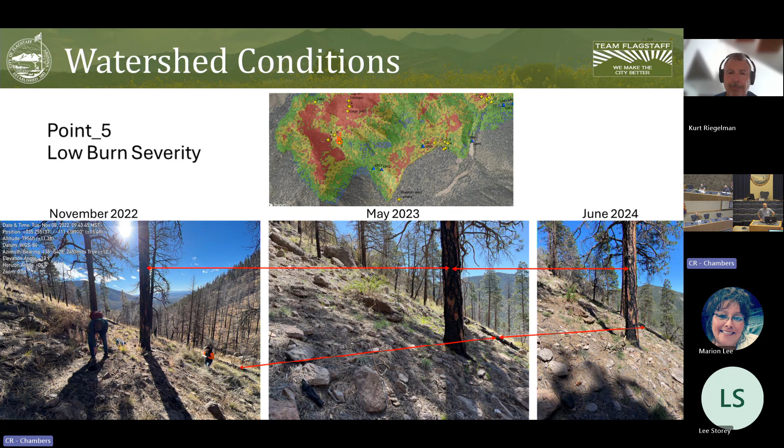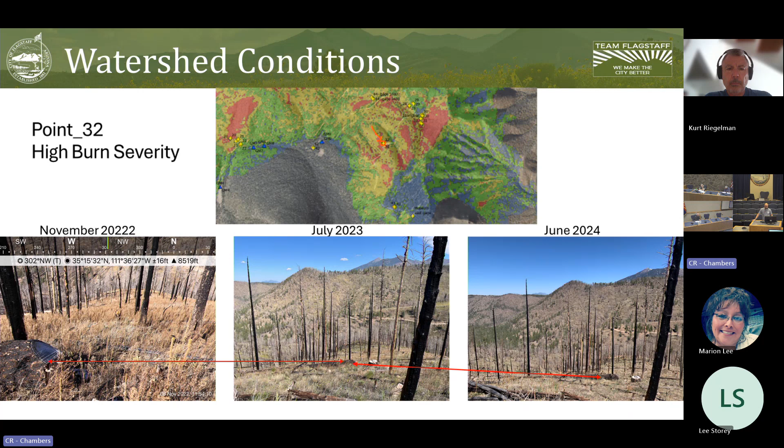Basically the takeaways, we've seen some recovery in the low and moderate burn severity areas. Some of the high burn severity has recovered to some degree as well. Mostly it's a vegetation state change for the moderate and high, so you're changing from a ponderosa pine forest to more grassland and shrubs, and that's been staying pretty consistent these last few years. Aspen and oak growth is improving. Spatial extent is pretty limited, mostly on those north-facing slopes. We've got quite a bit of early successional forbs and grasses coming through, so that is helping the watershed.

We're going to see a little bit less flooding than we did immediately after 2019. The significant blowdown of the dead trees is also helping. Looking forward, we're going to see how that recovery continues, and we're learning lessons from other fires in the area. Stormwater commissioned a study looking at the Museum predictions for the next 10 years, and we had some really cool results from the 1977 Radio Fire, which is on Mount Elden, to compare it. Cool in a scientific way, maybe not so cool from a flooding perspective.

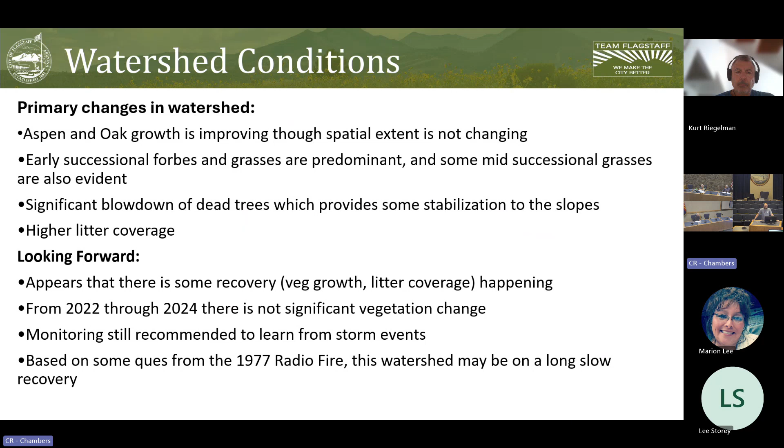So we do still see some heightened flood risk even in that 1977 fire, which is probably why Fanning Wash floods every 3 or 4 years. So the takeaway there is that we still have that flood risk in Spruce Wash. It's still quite a bit elevated from pre-fire. And then Joe's slides going into the 2024 monsoons.

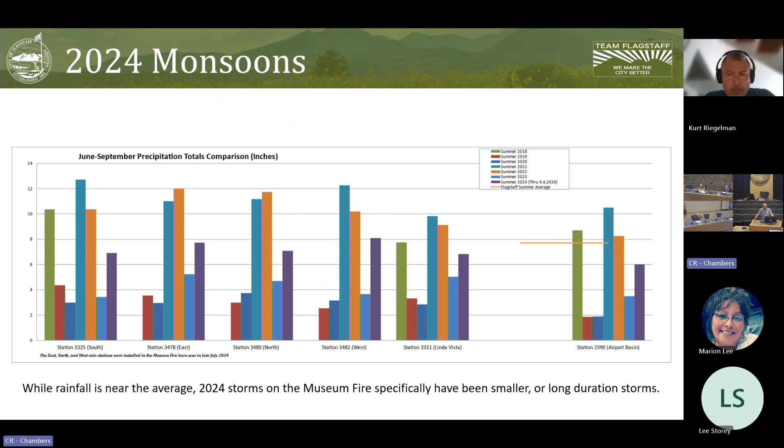A little busy here, but those purple bars on the far right of each station, so these are different rain gauges throughout the area. You can see that we had, I don't know, about average rainfall this year on that burn scar, but nothing that was too severe. And with that, we didn't really see much in terms of runoff.

One of the events early in the year is in June. It was over 2 inches on one of the gauges. It really got a lot of people worked up. But if you look on the radar on the right-hand side, you can see that storm barely hit that gauge in the burn scar. That one that's circled is 2.48 inches.

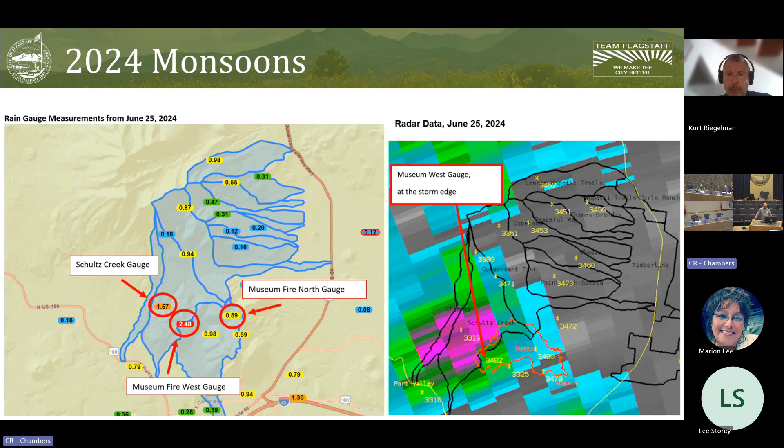That's Museum West, which is just right on the edge of Dry Lake Hills. So really, most of that rain was over on the Schultz Creek side and the unburned part of Schultz Creek. And that's why we didn't see much flow out of that one event. Again, going through it, we saw some rain events, but nothing that was too spectacular and nothing that really had large runoff. And again, one thing we're probably going to want to keep looking at is that watershed recovery.

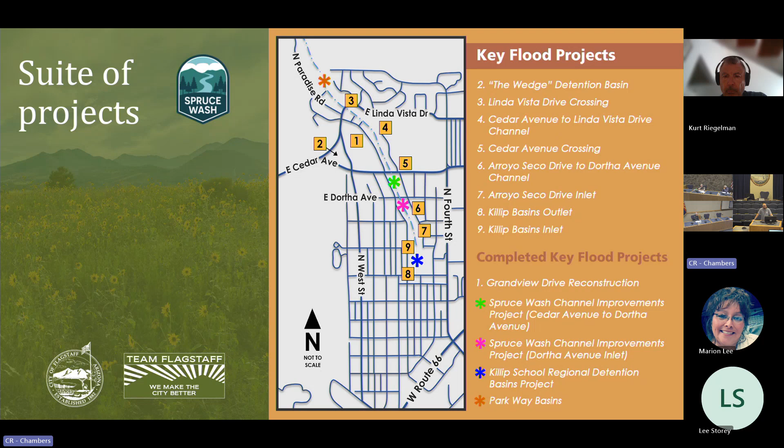So moving into some of those capital projects, this is that suite of projects for Spruce Wash, 10 projects. The ones that have a little asterisk are ones that are completed, and the ones that are still numbered are ones that are ongoing today. So obviously quite a bit of work, and we're moving very quickly on that.

So our original plan back in November of 2022, so just 2 years ago, when Proposition 441 passed, was to have this completed by the end of 2026. And we're moving pretty quickly on this. It's looking like the majority of this work is going to be completed next year in 2025. And 2026 will really just be final cleanup and closeout. So we are moving quickly.

Eagle Mountain Construction, who's the CMAR, the construction manager at risk, is working great with the team. We do have weekly meetings between our technical advisory committee and the CMAR.

Total estimated project cost right now is kind of bouncing around 39-40 million. So 26 million of that's from that Proposition 441 bond, and then we've been piecing together the rest and been really pretty successful with that. So a large component coming from our road repair and street safety, and then quite a bit coming from grants.

Apologies. So we'll go through. Go ahead. To take questions now or wait till the end? Sure.

I'm wondering if you could give us a little further description of the wedge project and the anticipated timeline for the closure of Linda Vista. I know that's a fair disruption to some of the residents in the area because the alternate is through, by the Puente de Hózhó and MEMS, and that's a nightmare in the mornings and afternoons. And so there are a lot of folks interested in when that will come to an end. Definitely. Yeah, so when we get to that project, I'll kind of walk through the timing on those.

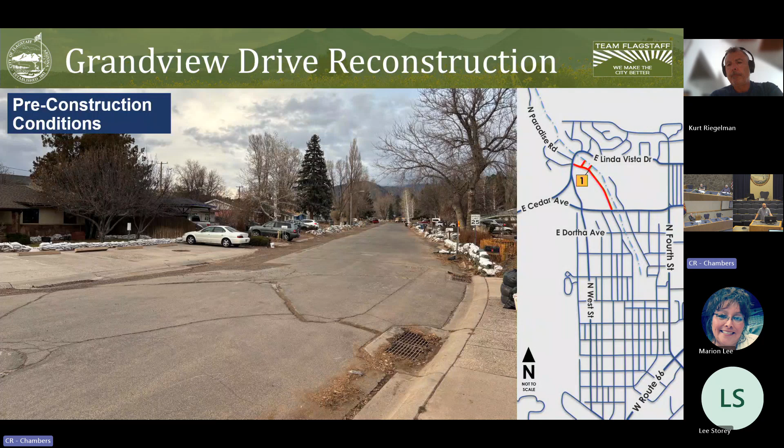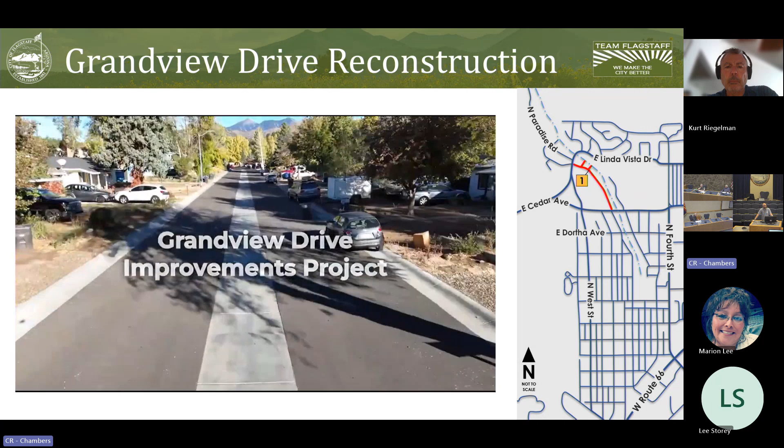Yep, no problem. So starting at the first one here, that's Grandview Drive reconstruction. Here's an old photo of it. The project was to invert that crown, and I think they actually had some drone video in this. So invert that crown so that the water is going in the middle of the street and then down towards Cedar and Main. So this is completed. You can see the street, the new curb and gutter. You can't see, but it cost a lot of money, the new utilities underground.

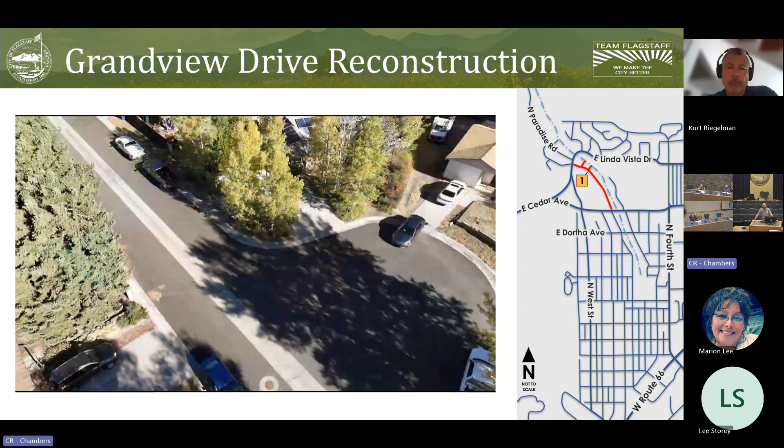So this has worked really great. And even this summer in those smaller rain events, we saw it work really great. So there's a lot of water in that central valley gutter that pushed it down to the terminal drain that pushed it back into the wash. So great project, great drone video. I believe that was done by our folks over in IT. But yep, so that one is complete.

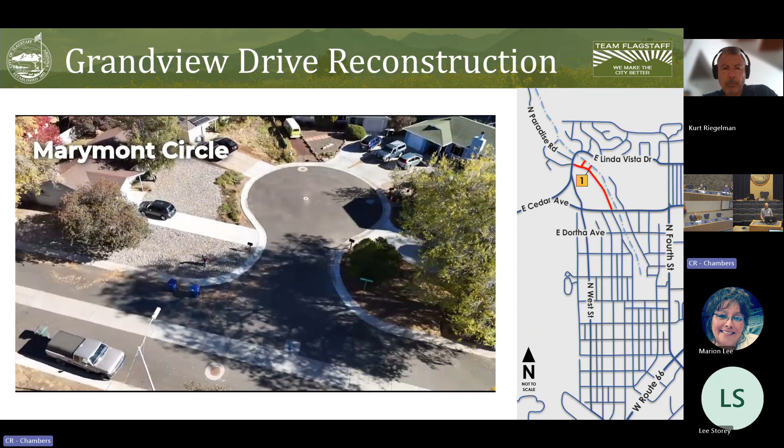All right, moving on. The wedge. So yeah, number 2. All right, so the wedge is an offline detention basin. So it is over in that area. We call it the wedge, the little wedge of city land over near Cedar Safeway.

So that is to take the overflow that will not fit in the channel and put it into the detention basin and meter that back into the channel along Cedar. To get there, what you're seeing in these photos is a 60-inch concrete pipe.

These are being installed right now, and that's the reason why Linda Vista is closed and will be closed until spring, as we complete the 60-inch pipe, as well as the Linda Vista culvert, which is also ongoing. We're doing both of those concurrently. A lot of work, they're moving fast.

If the weather holds up and we don't have a huge snowstorm, personally I'd like a lot of snow, it'd be great to go skiing. But if we don't have a big snowstorm, we'll probably be done with this early. But trying to be realistic and pessimistic, we're thinking springtime still for that closure.

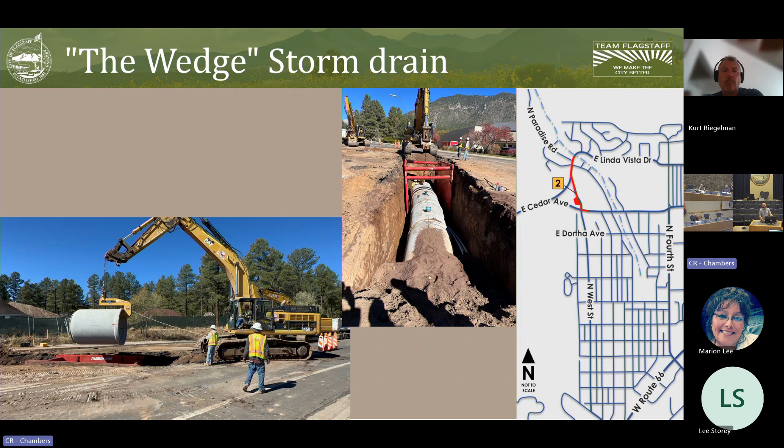But yes, we are very much aware of the disruption. I drive through it every day as well, so right there with you.

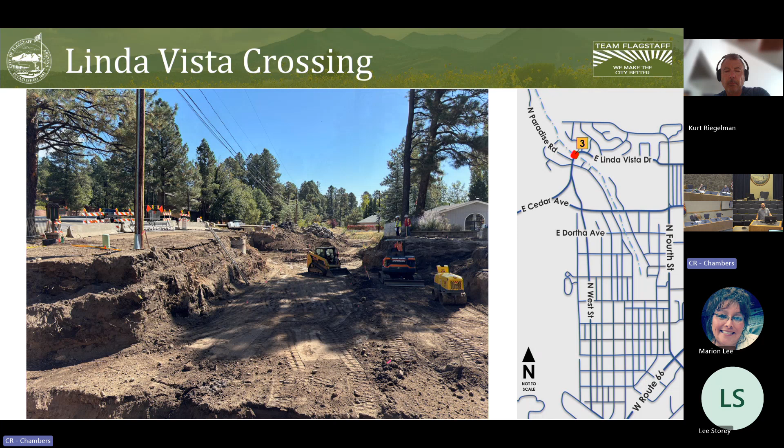Linda Vista Crossing, this is kind of an older photo. They're pouring concrete now, but that's that crossing, another reason why the road's closed. Moving quickly with it. This would be both the crossing to continue down the channel as it should, as well as the diversion into that 60-inch pipe when you reach a certain threshold. Here's some of the footings for it, and we're much further along as of today.

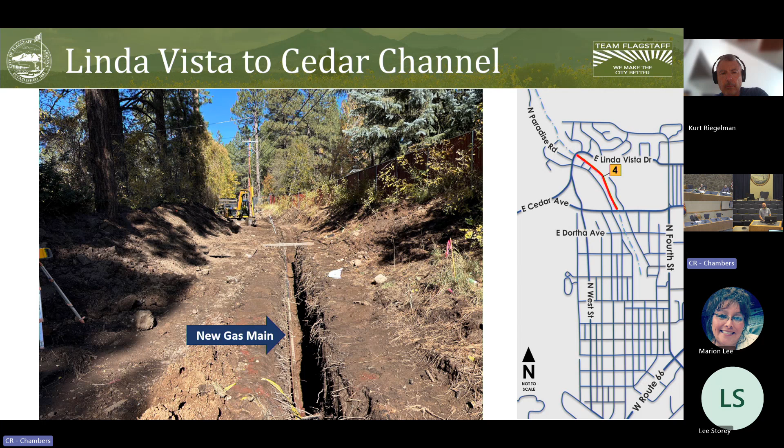Linda Vista Cedar channel. So we're doing the rough gradings going in right now. It was slowed up with some of the gas main, that's why there's a picture of a new gas main. There were some gas main issues as well as the service lines to the residents, but that's moving pretty quickly and will be a new shotcrete channel.

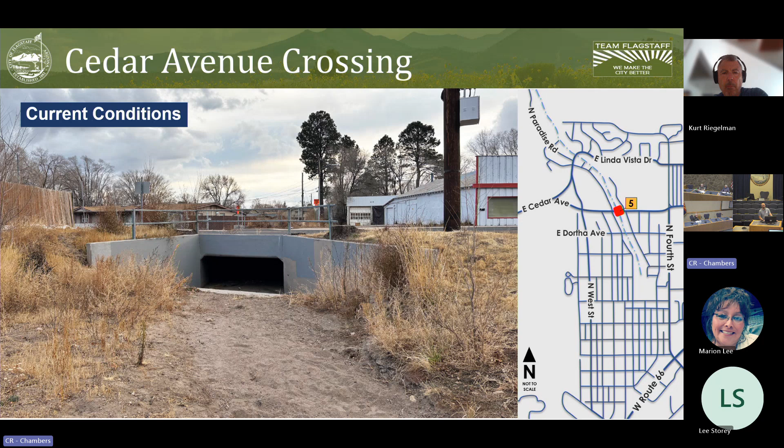Next, we see Cedar Avenue Crossing. This will actually be partially funded by a FEMA grant, one of the few FEMA grants that went seamlessly and quickly—I wish they all did. So here's our current condition, our concrete culvert, and the new culvert will be slightly larger and arched, so that will take more capacity, up to 700 CFS.

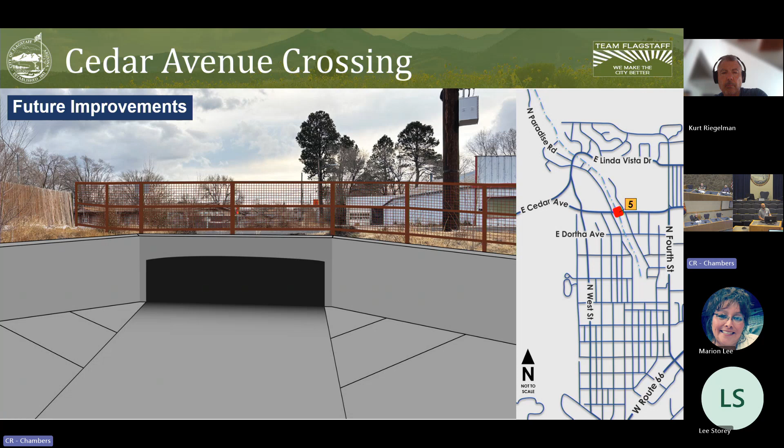And then what you can't see here is there will also be a lateral line coming in from whatever comes down Grandview, will be shunted back, and also the wedge will be shunted back to the channel underneath the road there. So you'll have some lateral storm drain coming back in.

Arroyo Seco to Dortha channel. This has gone through multiple design iterations, I think we're almost there. And that's going to also include some property acquisition that we are working very hard to get that congressionally directed spending through FEMA. It's been 2 years of wrangling, but we're very close.

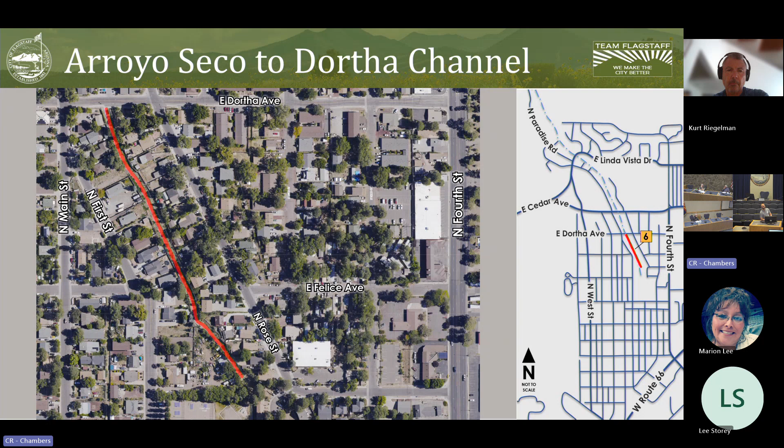And with that, we'll be able to buy a couple parcels that will help with this channel configuration, as well as help enlarging the Ponderosa Park—so it'll be a new portion of the park—as well as the inlet back to Arroyo Seco. This would be the inlet back into that 60-inch existing pipe.

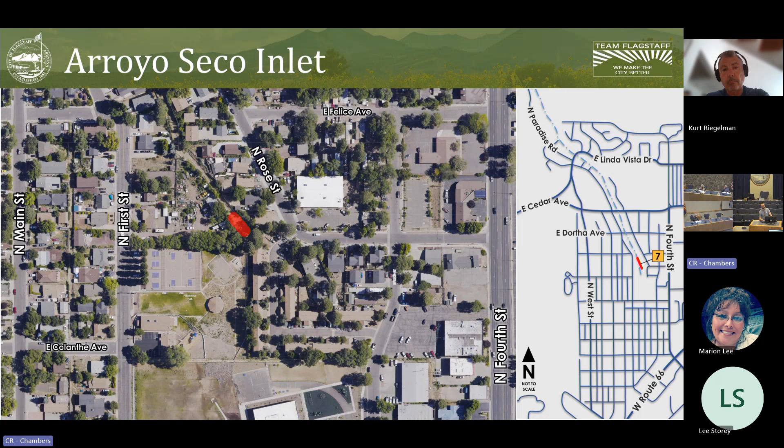What does not go in the 60-inch pipe will overflow through the park through a new natural swale—so natural, just kind of a low-lying area—and what we call the Killip Basin's inlet. It'll go through that swale and then drop down like a cascade into the existing Killip basins. There are 2 basins that exist right now that we built a couple of years back at Killip School.

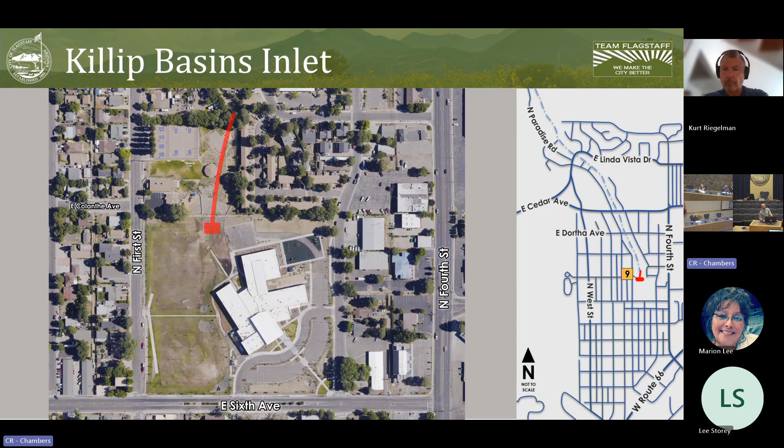And then a future one—this has kind of been stuck in limbo for a while, we're going to get it built one way or the other. This is another FEMA grant for the secondary Killip Basin outlet. So this is an outlet that would assist with the existing outlet. The existing one goes back to Spruce, but obviously that's going to be compromised when Spruce is flowing full.

So this secondary outlet on the north or southwest side will flow into the west wash drain, which is a 48-inch drain that goes down—I can't remember which street—but they'll connect to that, and then bring it down and connect back at Route 66 where it's open channel. So it gives us a second way to have a pressure relief valve, if you will.

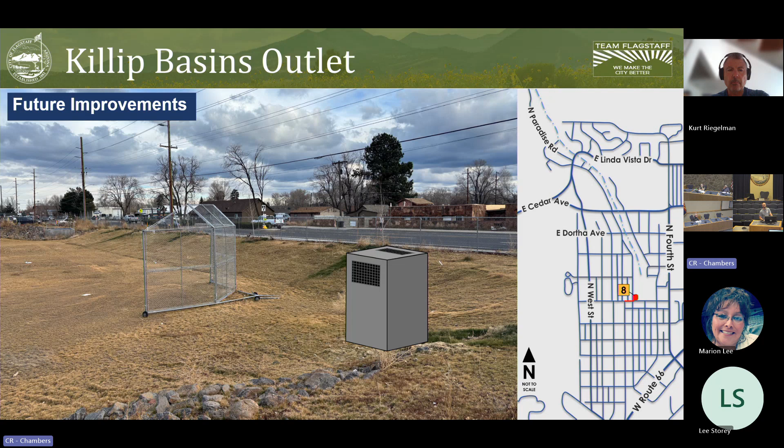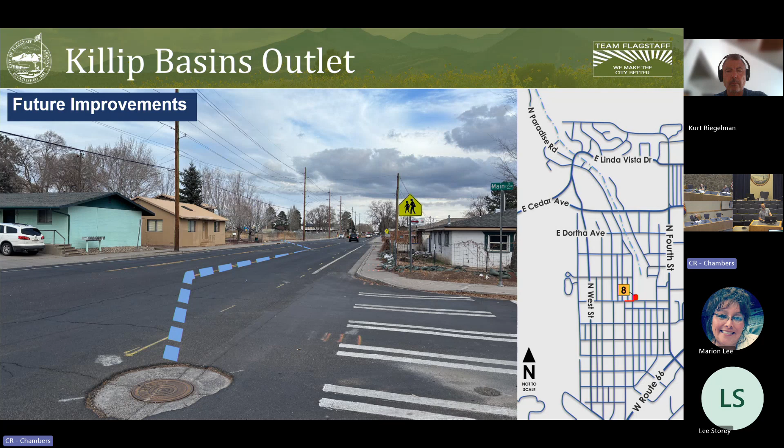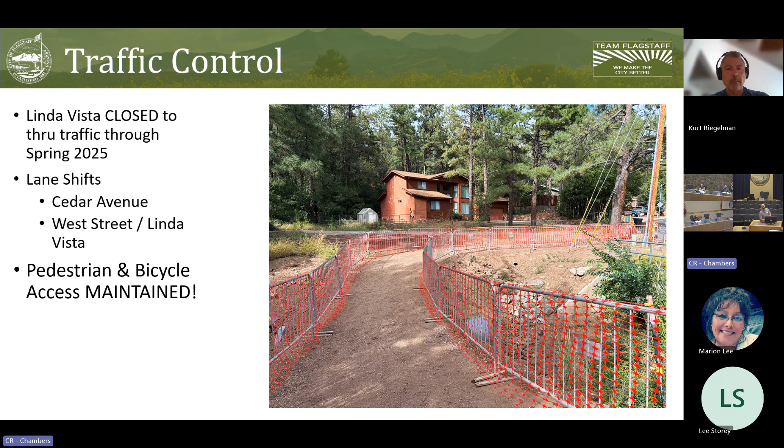So this really is the biggest road closure that we're going to have in this whole suite of projects.

Lots of communication going out with Beta PR, our contracted communications group, as well as Sarah Langley's group here at the city. So a lot of good stuff going out in terms of meet in the streets, news releases, door hangers, weekly newsletters, meetings with Sunnyside Neighborhood Association, etc.

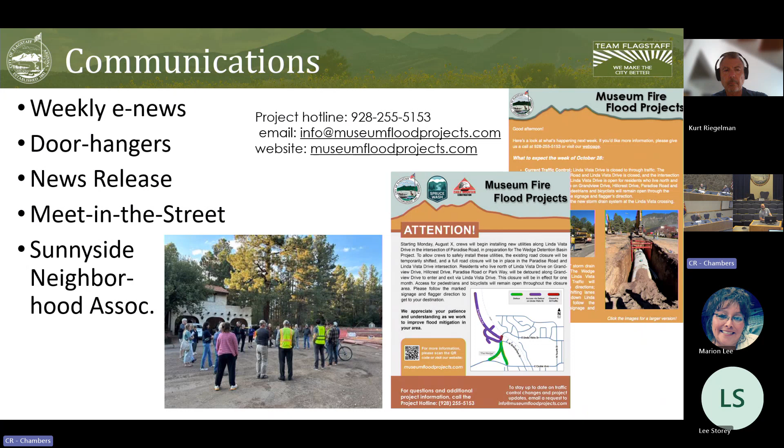All right, so moving from museum fire over to pipeline fire, from the east side of town to the west. Schultz Creek is complete, which is really pretty impressive for two years after a fire.

So it's a whole suite of projects, kind of hard to see on this map. Some county funded ones up on the forest in terms of sediment stabilization structures, our Schultz basins at the Schultz Y, Francis Short Pond being dredged, Savannah Way having a new swale installed, and then most recently, and probably the biggest, the Highway 180 project.

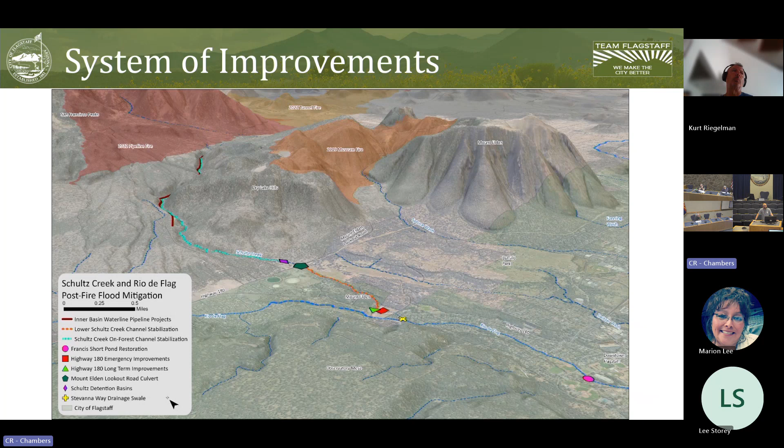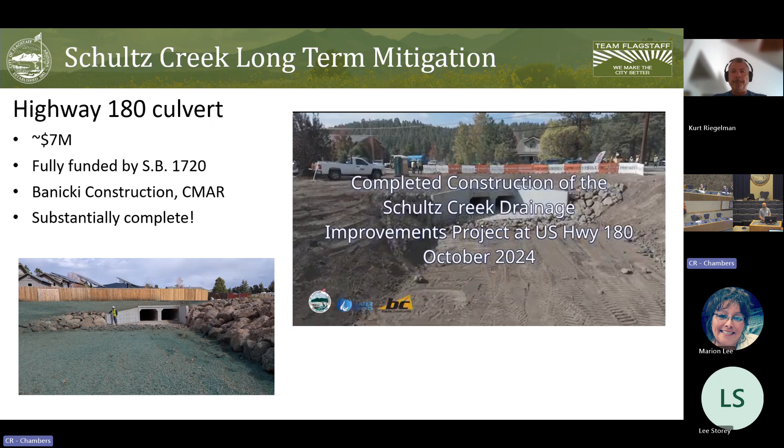So Highway 180, it is done. Has about $7 million, fully funded through Senate Bill 1720. We have a quick little drone video here that shows you the inlet, the outlet, and the configuration of it. So really great project.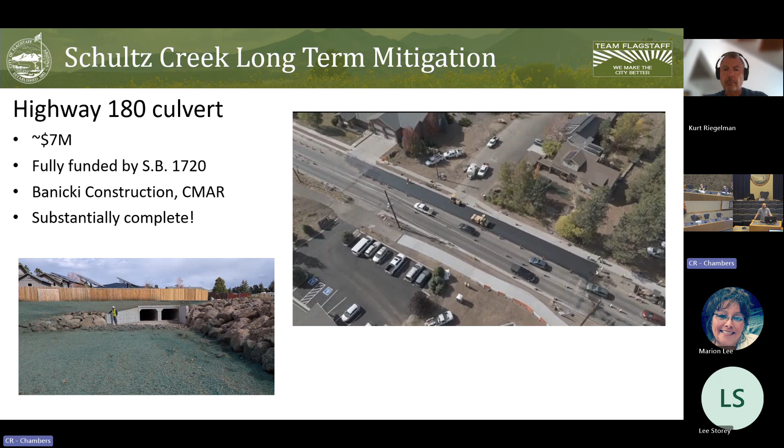Banicki Construction was our partner, great folks to work with. We have a huge amount of capacity now, almost 1,000 CFS that we can take through this new pipe. The old pipe's capacity was about 40. So it went from 40 CFS to about 1,000, a pretty substantial improvement. You can see the open channel, a new open channel that drains down to the Rio. Very cool project, great people to work with.

Grand Canyon Trust, we worked with them, the fire station, American Conservation Experience, the Lutheran Church, Museum of Northern Arizona. So quite a few partners there, and some great work.

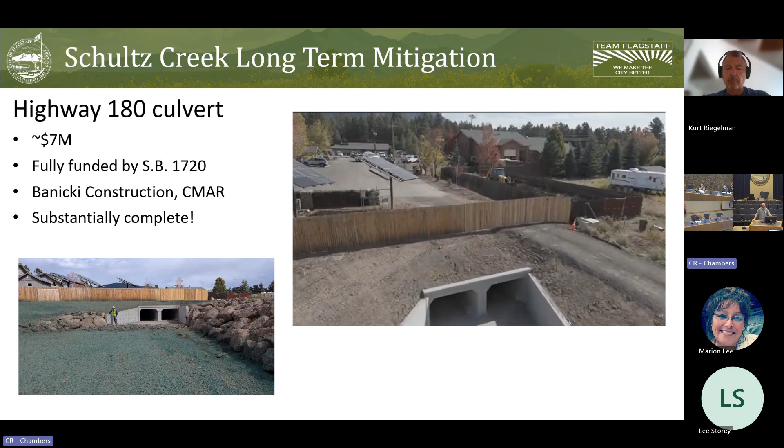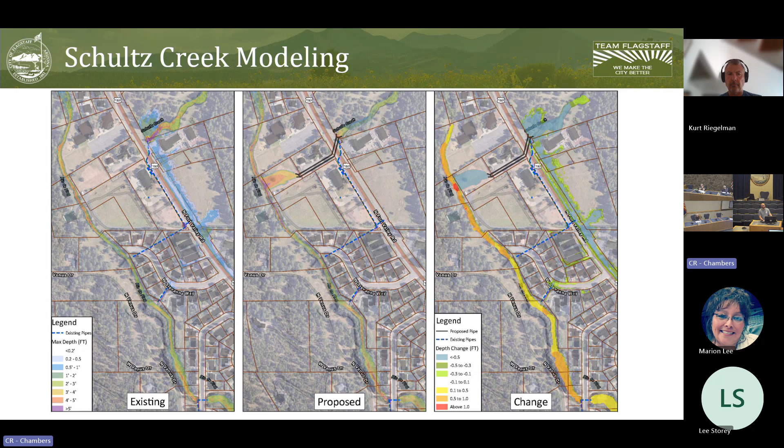This will provide benefits not just for the post-fire environment, but also for the FEMA floodplain. So when we have this remapped, we'll be able to remap some areas out of the FEMA floodplain, which will be a great success. We'll be working on that in the next few years, hoping to get a grant, but if we don't, we'll find some stormwater funds to pay for that study.

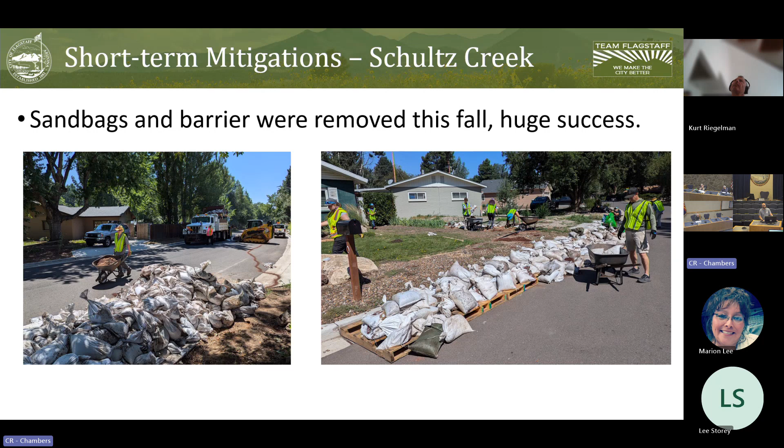So with that, the short-term mitigations over in Coconino Estates have been removed, which is also really great to see. The sandbags, the barrier, everything in Coconino Estates, Savannah Way area has been removed. Some of it in volunteer events and some both contracted and staff events to get that out of there. And that cinder has been repurposed.

We had Joe Dirt excavating, bringing their trommel screen, which is like a giant drum, and they're able to separate out the cinders from the bags. So we're reusing the cinders, and the bags are taken to the landfill.

Brief mention, we did have some non-fire related flooding this year, all very localized. A little bit on Meade Lane and Coconino Estates, some on Lockett Drive, Country Club area, and then Foxglenn area. Just saw some microbursts that had some localized flooding, mostly sidewalks, yards. I think there's a few garages that saw some water.

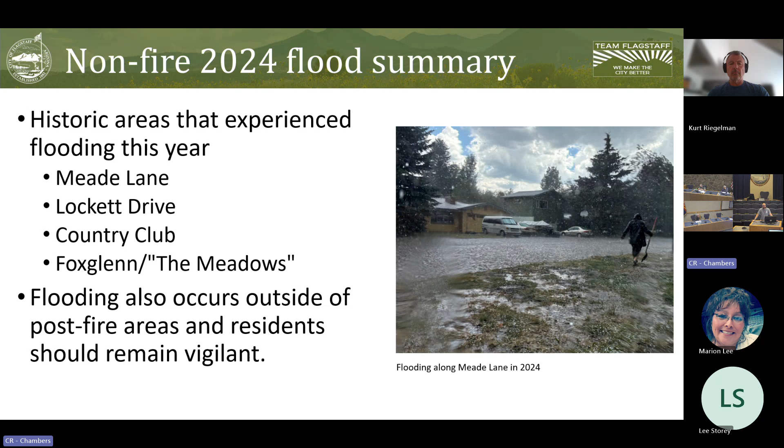Just a reminder, even though we spent a lot of time talking about wildfires and floods, there's a lot of flooding issues in the city, obviously related to just urban infrastructure and old code.

Legislative actions, or lobbying I should say. We've had a whole lot of meetings between staff, policymakers, others, lobbyists, with both state, federal, nonprofit leadership to really highlight the community need here and to bring in new funding. And it's been pretty successful. We've had $7 million of external funding secured in the recent past, and we're pushing very hard for quite a bit more.

New administration will be interesting to see how that plays out, but we continue to do what we can to bring some dollars into the community so that we are not funding it through just local ratepayers and local tax dollars, since it is obviously quite expensive.

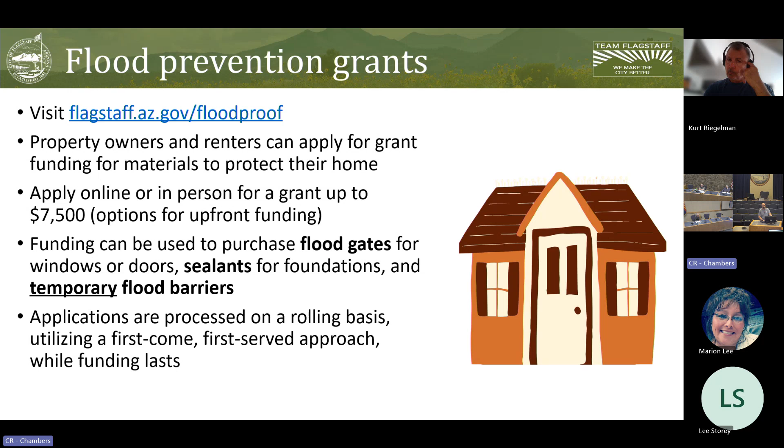Sustainability also has some flood prevention work they're doing concurrently with stormwater. They have a series of small community grants for flood proofing. It's pretty big, and that website has a wealth of information. Brady Henderson over at Sustainability is great to work with on some of these mitigation tools. So just getting that out there to the community as a resource we have.

With that, I know I ran through the slides really quickly, but I didn't want to be here for two hours. If you have any questions, happy to help, and if I don't have the answers, I'll get back to you with what I can find out.

Hey Kurt, I have one quick question. When we did the bond, we were talking about the need for more operating revenue because of the retention or detention ponds we had to put in place because of the fire, and we did that with federal funds. There was an uptick we predicted of $1 million a year in terms of maintaining those, digging them out and everything. How's that tracking? Are they being maintained? Are we on budget, a little under, over? What do you think?

Sure. That's a hard one because it's going to be tricky based on events. We haven't seen a whole lot of sediment in, for example, Schultz basins -- there's a little bit in that upper basin. Parkway Basin saw some pretty substantial damage this year, which is tricky because that has not yet been transferred over to the city -- it's still owned by the county flood control district. So that has not been repaired, and we'll have to figure out who's got that on their docket. So yes, there's maintenance we know of, and there's maintenance that's going to be ongoing and expensive. Maintenance of detention basins is pretty steep. There are some flood control districts, not here, but in other parts of Arizona and the Southwest, where the majority of their operational budget by far is for clearing out sediment. We're going to be there. As we keep building holes in the ground, we're going to be spending even more money on operations.